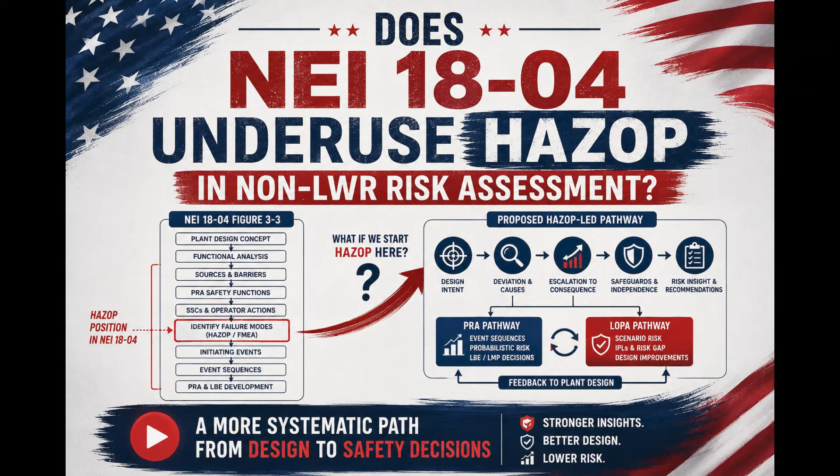Does NEI 18-04 underuse HAZOP in non-LWR industry and reactors risk assessment? NEI 18-04 explicitly includes HAZOP in the development of the PRA for non-LWRs. But look carefully at figure 3-3. My question is, are we using HAZOP too narrowly, and could we use much more of what HAZOP already does

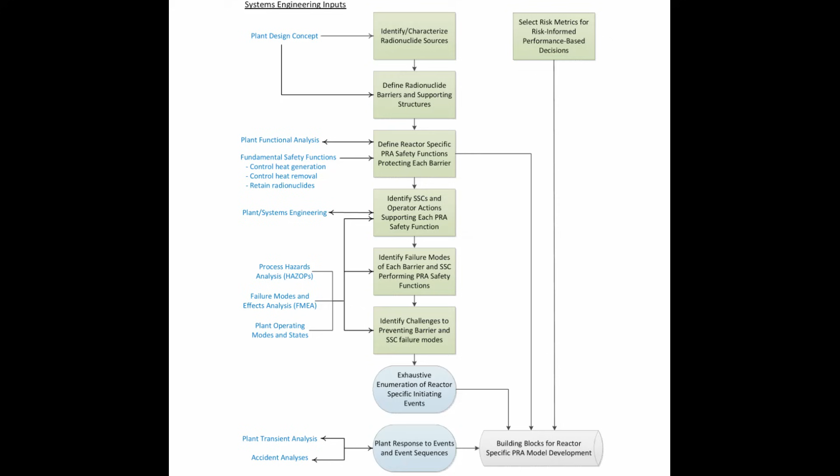from the very beginning of plant design? I want to walk through figure 3-3 exactly as NEI 18-04 presents it, and then rewind it and show you an alternative pathway, not to replace PRA, not to replace the LMP methodology, but potentially to create a more systematic and traceable pathway from plant design to hazards and risks, and then to design improvement, and then to PRA, and finally to LBEs. NEI 18-04 explicitly includes HAZOP in the development of the PRA of non-LWR industry and reactors.

Let's start here. Plant design concept. NEI 18-04 recognizes that LBE development begins very early, when many design details may not yet be available and the PRA may not yet be mature. At this stage, an initial set of LBEs is proposed using engineering judgment, relevant experiences, and available design information. NEI 18-04 also recognizes that this initial set may not be complete. As the design matures, the PRA matures with it, and the LBEs are progressively refined.

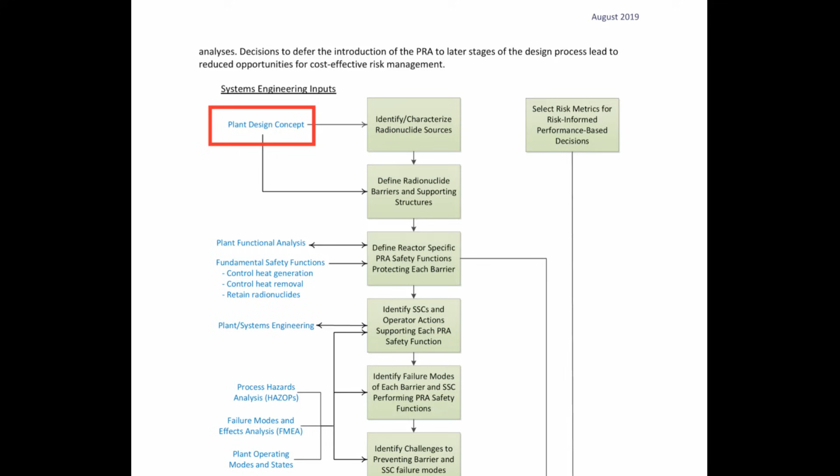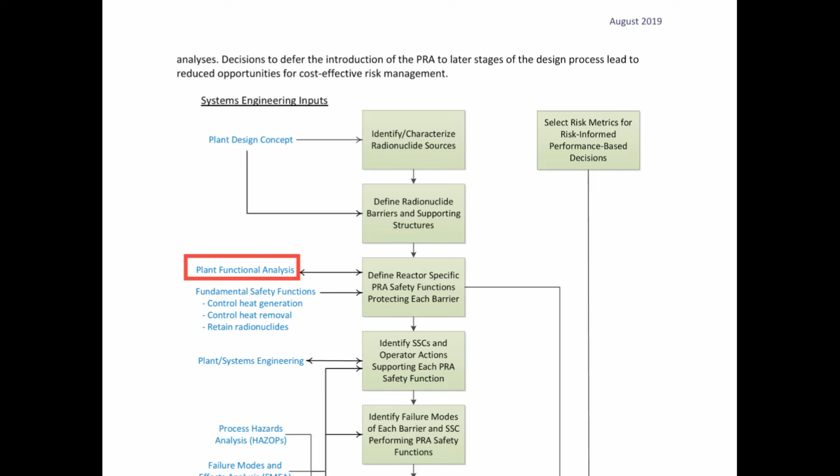So let's follow figure 3-3. From plant design concept, we move to plant functional analysis. NEI 18-04 identifies three fundamental safety functions: control heat generation, control heat removal, and retain radionuclides. These establish the fundamental safety objectives that the design needs to achieve. We need to understand where radioactive material exists and what needs to be done to prevent the release of those materials. That leads directly to the next step.

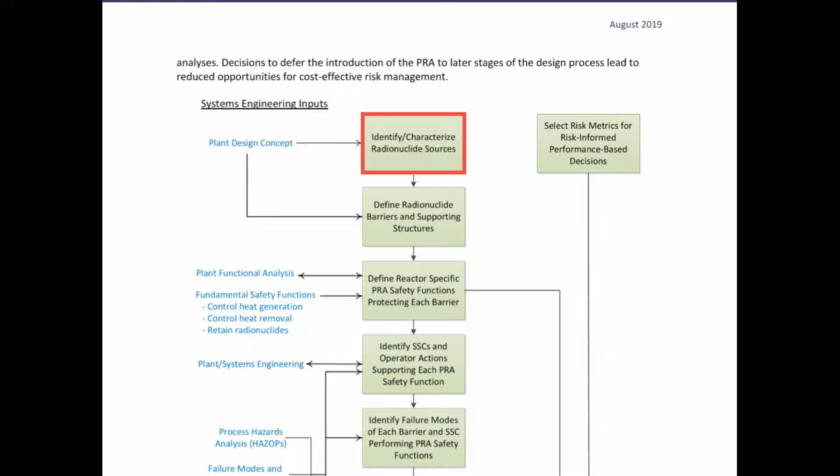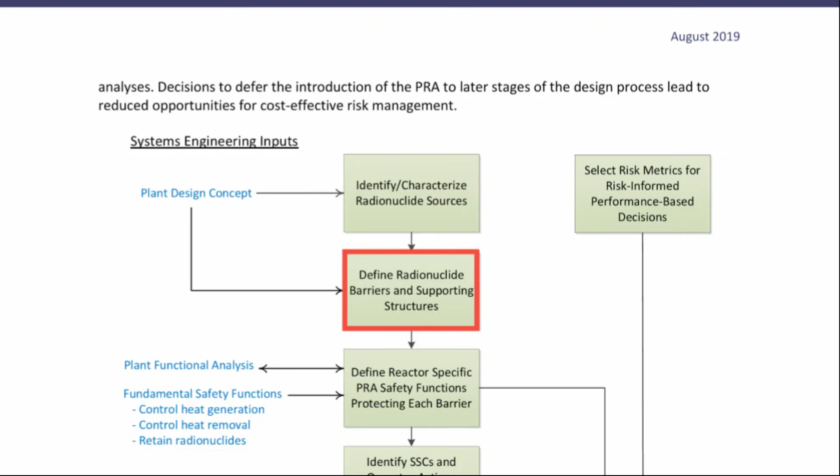Now we are identifying the barriers that are responsible to retain those radionuclides. This is important because the PRA ultimately needs to understand the event sequence that could result in a release of radioactive material. NEI 18-04, therefore, builds much of this structure and architecture around protecting those barriers.

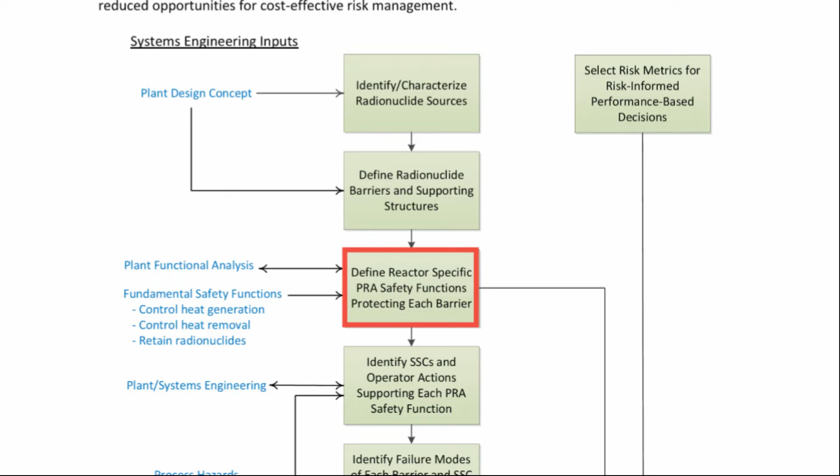The next question becomes, what functions are responsible to protect each barrier? NEI 18-04 calls these PRA safety functions, or PSFs. A PSF is essentially a function modeled in the PRA that prevents or mitigates a release of radioactive material. So now we have moved from what needs protecting to what safety functions provide that protection. The next question is, what SSCs and operator actions actually perform those PSFs?

SSC means a structure, system, and component. A structure could be a physical barrier or supporting structure. A system could perform a safety function such as heat removal. A component could be an individual pump, valve, sensor, actuator, or other item within that system. And operator actions can also contribute to the required safety function. So figure 3-3 has now established, starting from radionuclide source to barrier, and then to PSF, and then to SSC and operator action.

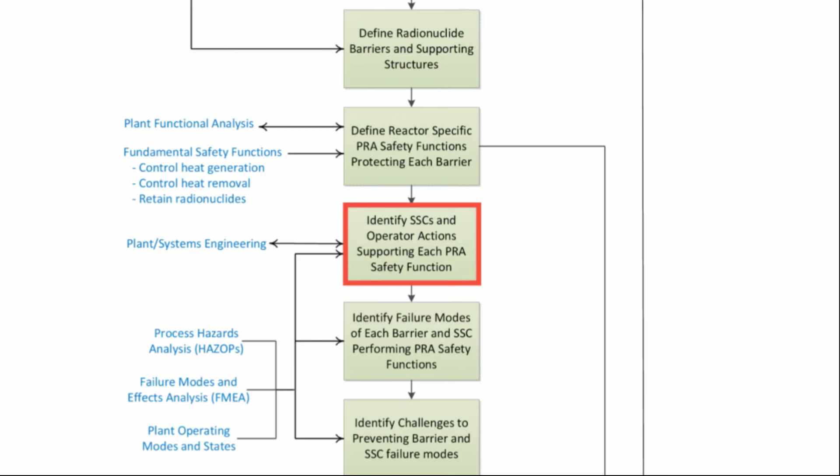And now we have reached the part that particularly interests me. The next box asks us to identify the failure mode of each barrier and SSC performing PRA safety functions. Figure 3-3 explicitly shows HAZOP and FMEA as system engineering inputs into the PRA development process. This isn't accidental. NEI 1804 says that before the first design specific PRA is introduced, we need a technically sound understanding of potential failure modes, how the plant responds to those failure modes, and how protective strategies can be incorporated into the safety design. It specifically identifies early safety analysis methods such as FMEA and PHA as ways of making those evaluations systematic, reproducible, and as complete as the current design stage permits. And elsewhere, NEI 1804 explicitly identifies HAZOP as one technique that can support the initial selection of LBEs. So HAZOP clearly has a legitimate role here.

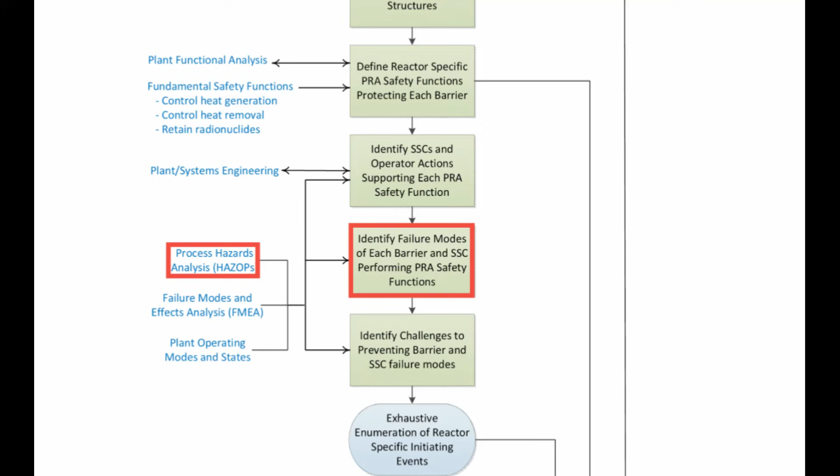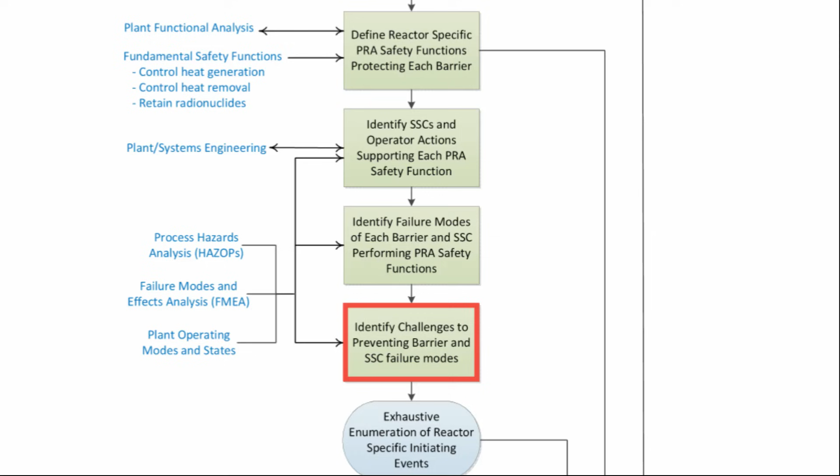Once those failure modes are understood, figure 3-3 moves to identify challenges to preventing barrier and SSC failure mode. In other words, what could challenge these functions? What circumstances could cause these barriers, systems, or components to fail? And what combination of failure or conditions need to be considered? This information then contributes to something extremely important. Now we are where the exhaustive enumeration of reactor-specific initiating events start.

This is where the relationship becomes particularly interesting. NEI 1804 says that HAZOP and FMEA can be applied during design development to identify initial failure scenarios and support the initial PRA tasks to define initiating events. So we are moving from failure modes to challenges and from there to initiating events.

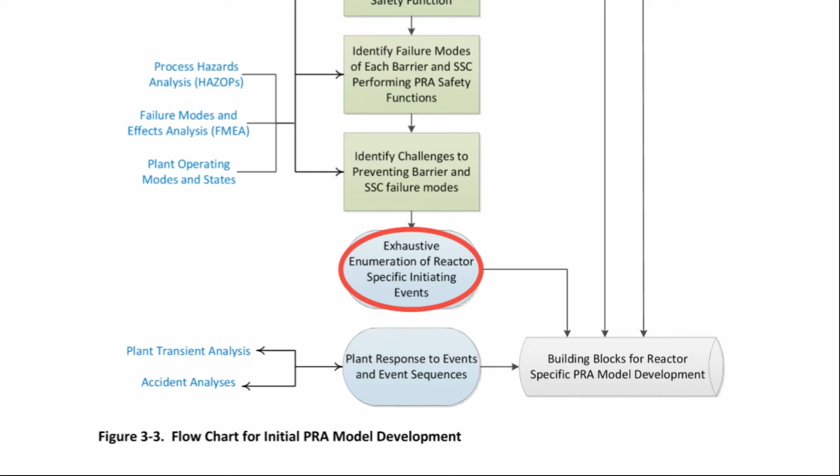Then, how does the plant respond to those events? The initiating event occurs. Different SSCs and functions may succeed or fail. Operator action may succeed or fail. Barriers may remain effective or become challenged. And these combinations develop into event sequences. Those event sequences become fundamental building blocks of the PRA. NEI 1804 says the PRA systematically enumerates event sequences and evaluates their frequencies and consequences, including uncertainties and common cause failure.

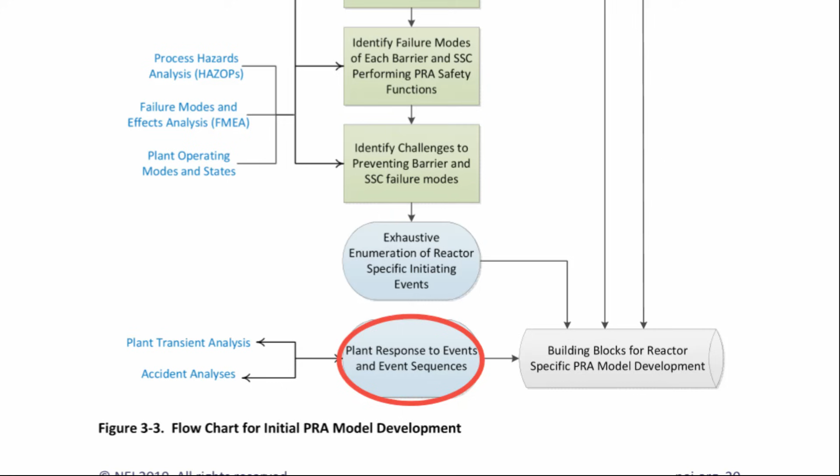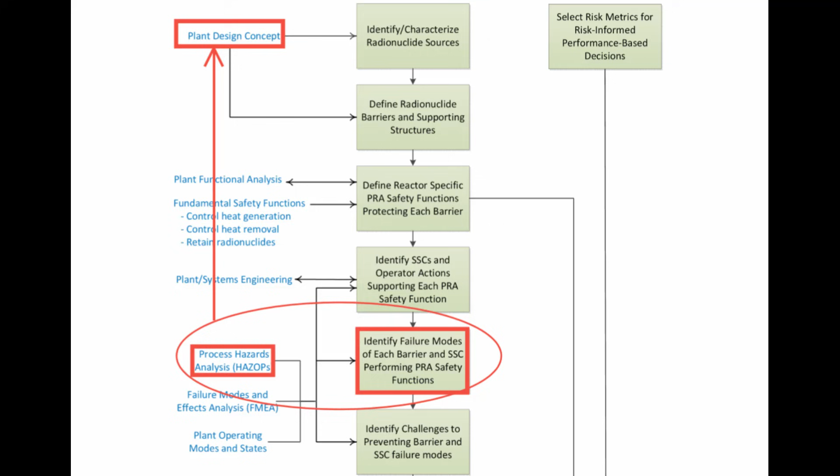I'm going to stop the conventional pathway here because I'm not proposing to replace PRA. My question is about what happens before we get there. Now let's rewind figure 3-3 all the way back to plant design concept and ask a different question. What if we use the full systematic capability of HAZOP from here, meaning from plant design concept? In process industries, we don't necessarily wait until individual safety-related equipment has been identified before systematically challenging what can go wrong. We can start with the design itself. Take the plant, break it into logical HAZOP nodes.

Establish the design intent of each node, then systematically challenge the intent using guide words and process parameters, such as no flow, more flow, low pressure, high temperature, etc. Each credible deviation then becomes the beginning of a structured engineering investigation.

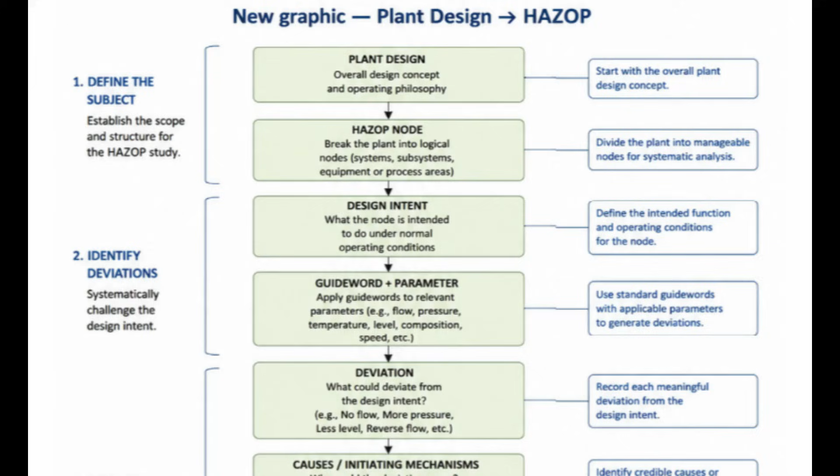Then, by using a brainstorming methodology, we figure out what are the potential causes for those deviations and initiating mechanisms. And then we look into the immediate physical effects step by step. We take them up the escalation ladder one by one, define the consequences. And at the end of that, we get a final ultimate consequence for each escalation pathway.

And finally, the ultimate credible consequence is defined. Now we have created a traceable scenario from the physical design itself.

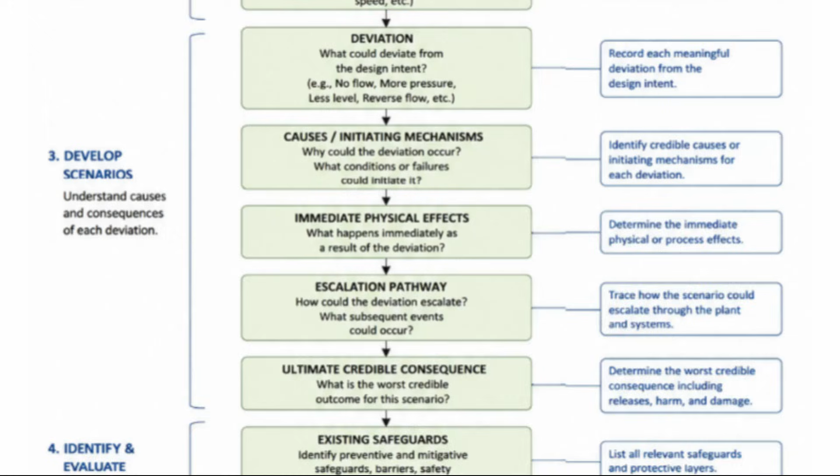But we don't stop at the consequence. We identify the existing preventative safeguards, mitigative safeguards, barriers, safety functions, SSCs, and operator actions. Then we challenge them. Is the safeguard actually effective against this particular scenario?

Is it independent of the initiating cause? Are two apparently different protections dependent on the same system? Could they be defeated by the same common cause? Are we relying excessively on one layer of protection? And what happens if that layer fails?

Now we have something very interesting. We have systematically connected plant design to the deviations. And from there, we find out what are the initiating mechanisms, and then what is the escalation path and ultimate consequence, and how they are connected to the protection architecture.

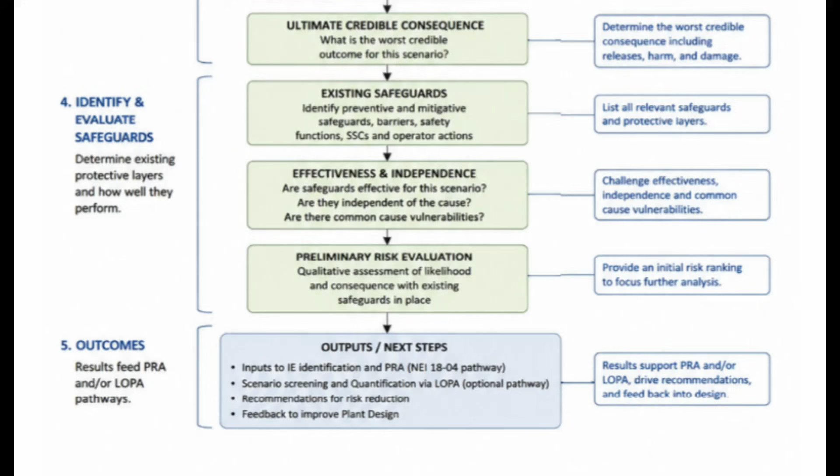And from here, I see two complementary pathways. The first is the established NEI 18-04 pathway. The HAZOP information can support the identification of failure scenarios, initiating events, and event sequences. The PRA then performs the rigorous probabilistic modeling. It evaluates system success and failure.

Those event sequences can then be grouped into event sequence families, which support the identification and refinement of the LBEs. NEI 18-04 explicitly explains that PRA event sequences are grouped into families based on similar initiating events, challenges to PSFs, plant responses, and end state. Eventually, we arrive at the LMP decisions around LBEs, SSCs, and DID.

Nothing I'm proposing removes that pathway. The second pathway is my proposal, a supplementary LOPA pathway. LOPA stands for Layer of Protection Analysis. This second pathway is my proposal. It's not a requirement of NEI 18-04. For selected scenarios identified by HAZOP, we could perform a LOPA.

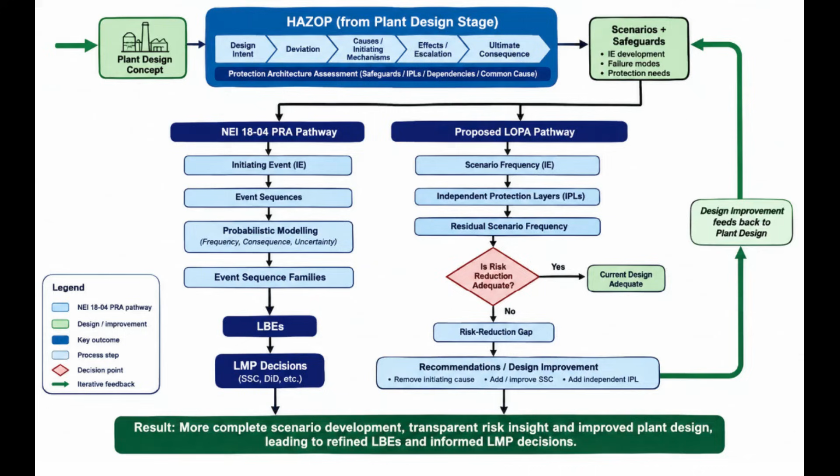The important point is that the result can be fed back into the plant design. That is the important part of this pathway. So let's return to figure 3-3. NEI 18-04 already recognizes HAZOP. It already recognizes its contribution to identifying failure scenarios and supporting initiating event development. And it says something even more significant.

Traditional system analysis techniques, including FMEA and HAZOP, which were used to define LBEs for currently licensed reactors, have been incorporated into the PRA methodology for selecting initiating events and developing event sequence models. So my question isn't, should HAZOP replace PRA? Absolutely not. My question is, are we using enough of HAZOP's capability?

Instead of using HAZOP primarily as one systems engineering input supporting failure modes and initiating event identification, could we exploit its full systematic scenario development capability from plant design concept onwards? Could we create a continuous traceable chain from plant design to design intent, deviation, cause, escalation, ultimate consequence, safeguard, initiating event, event sequence, and then PRA, event sequence family, LBE, LMP decision?

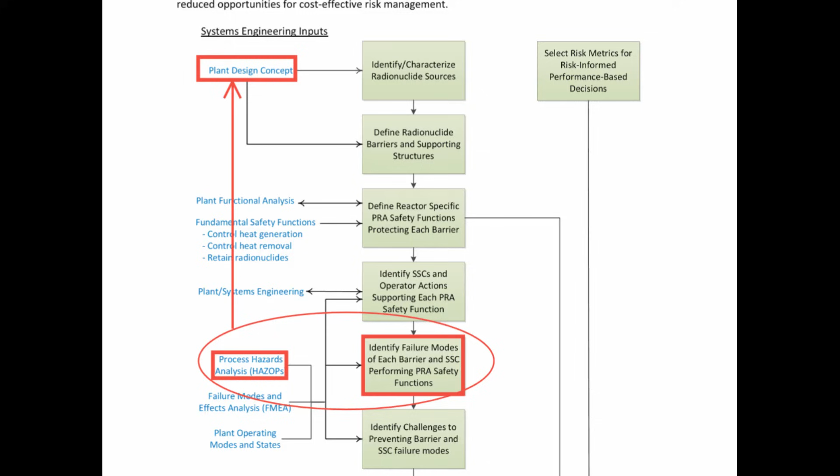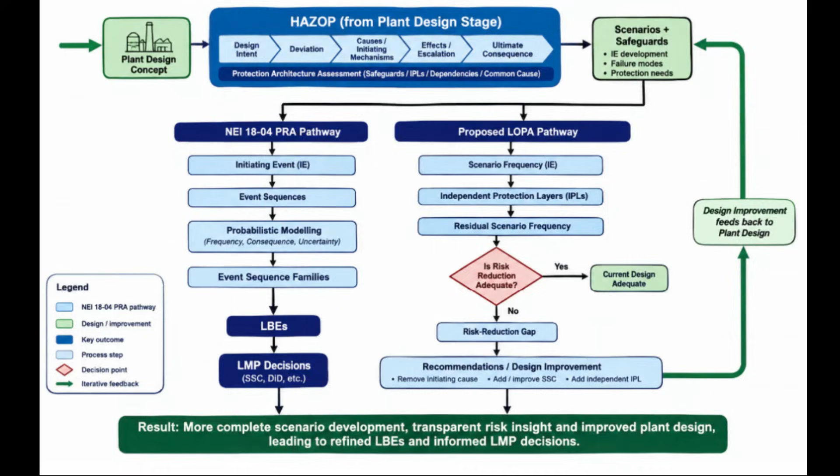That is what I'm asking. And could a supplementary LOPA pathway provide earlier transparent insight into protection layer adequacy and potential risk reduction requirements, feeding improvement back into the design before the PRA reaches full maturity?

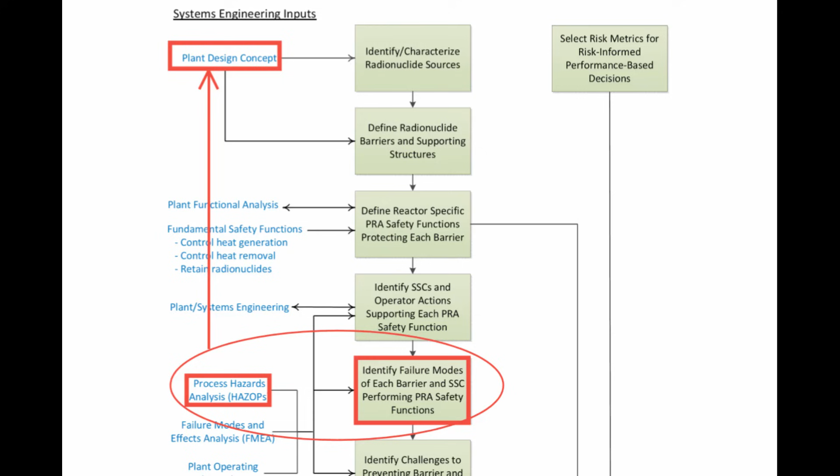I don't believe that question should be answered theoretically. It should be tested instead. Take one representative system, apply the conventional figure 3-3 approach, then apply the expanded HAZOP approach to the same system. Compare the initiating events, compare the event sequences, compare the dependencies and safeguards identified, compare the design insights, and then ask one question. Did the expanded HAZOP approach identify anything?

If the answer is no, we have learned something useful. But if the answer is yes, then perhaps HAZOP has got more to contribute to non-LWR risk assessment than figure 3-3 initially appears to suggest. Thank you.